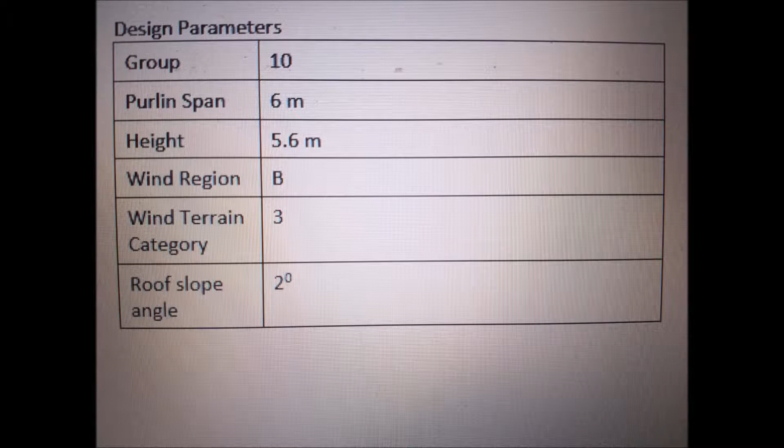And no, my screen is not dirty, it's scratched, okay? It's scratched.

So, while I wrote a fantastic, riveting introduction that would make Shakespeare quake, the smart ones were off calculating the self-weight of purlins, the weight of the ceiling, weight of insulation, services, and loads.

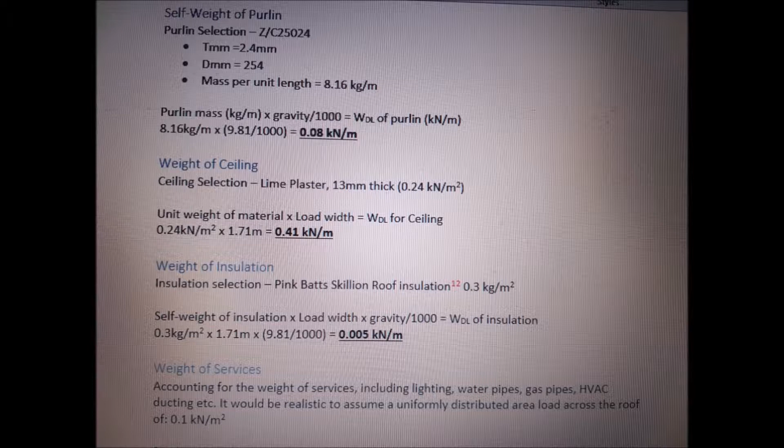The focus of this assignment is to design a basic shed in a Region B location, in accordance with Australian codes and regulations, while demonstrating critical thinking abilities in terms of design, problem solving, and identifying various hazards. The proposed shed will span 6 metres, reach 5.6 metres in height, and is classified under Wind Terrain Category 3.

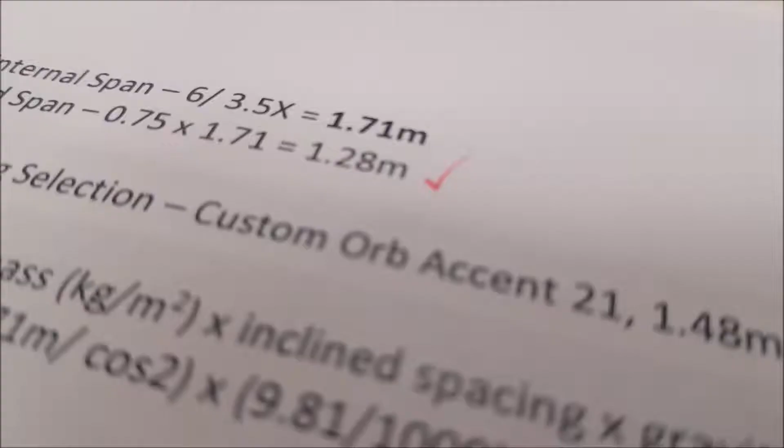When designing a shed, a multitude of structural elements must be taken into consideration in order to produce a fully functioning, safe and practical construction, which will remain fit for use and be durable enough to lessen the need for maintenance. Fundamentals to consider include bracing layout and design of bracing elements, purlins, typical sidewall girts, columns, rafters and design loads.

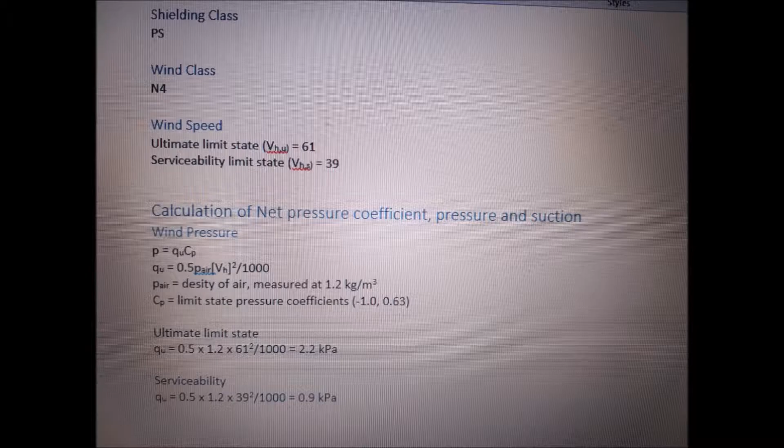The shed will be designed as a braced box structure, an effective design in terms of wind loads. All connections will be pin ends made from structural steel, as this is the most successful option in terms of withstanding tension and compression. The roof and walls of the proposed shed will be Lysaght Trimdek, a superlative option in terms of shed design, as the long-spanning cladding allows for wider spacing between supports.

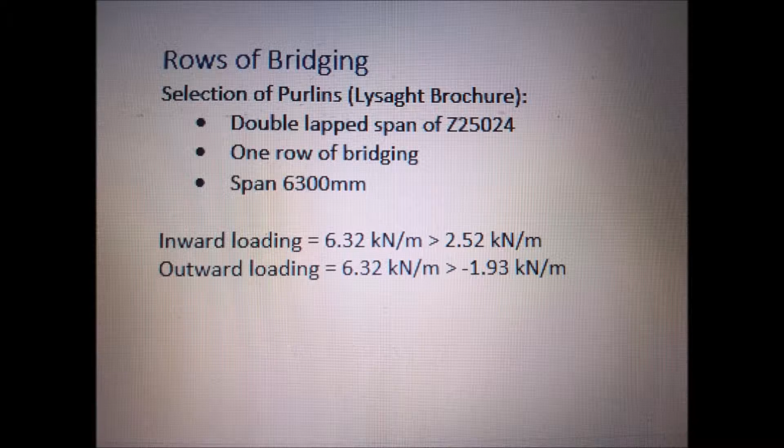The purlin and girt sections will too be made of Lysaght manufacture. Determining design loads, such as dead and live loads, is crucial to the process in order for the shed to be able to support and sustain loads and resist forces.

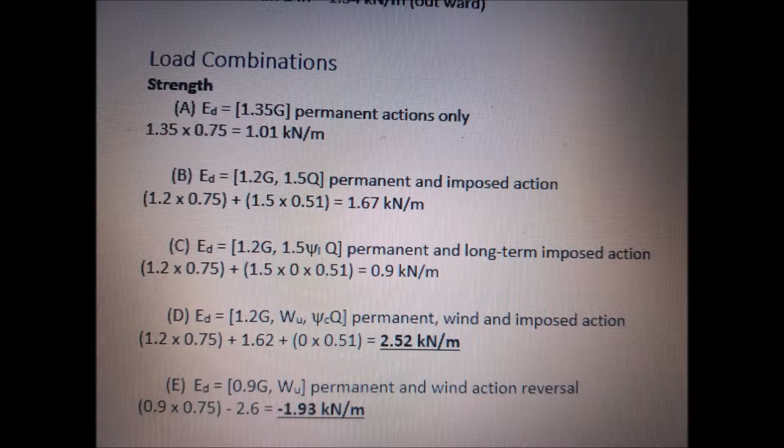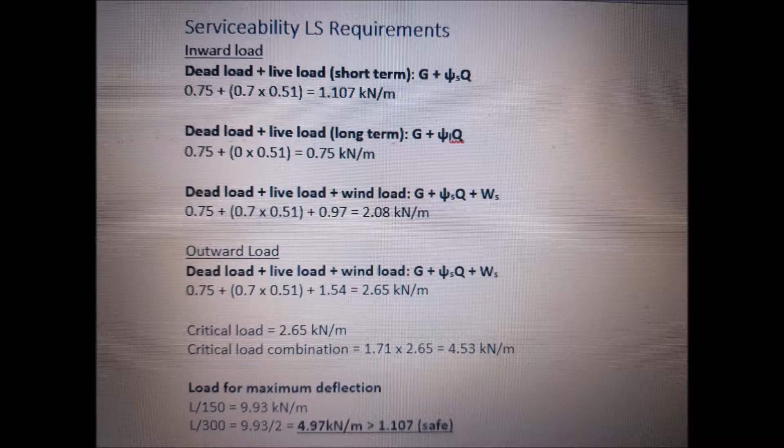Wind loads must also be taken into consideration. Wind actions occur when airflow applies pressure on a windward wall, passes over a structure and moves away from the surface of the roof, creating suction, and therefore creating suction on the leeward wall also. Failure to calculate wind loads appropriately renders the structure susceptible to damage and negatively impacts the dynamic quality of the structure. The proposed shed in this scenario is located in Region B, with partial shielding and a wind terrain rating of 3.

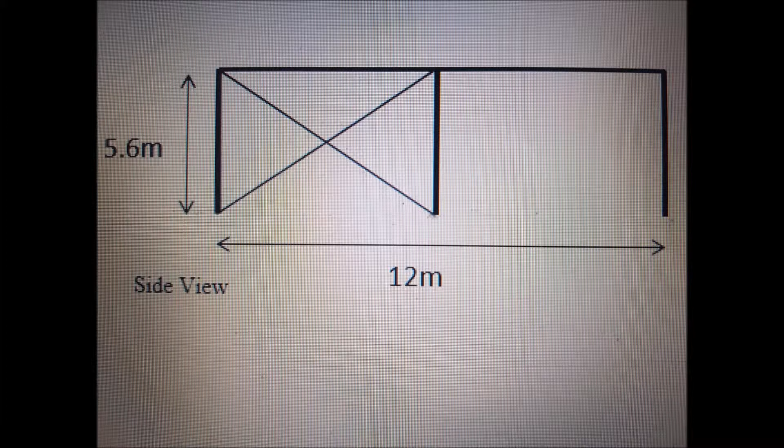Now, two words: roof bracing. In order to design the roof bracing, all compression and tension forces need to be calculated. These have been calculated through the use of method of section and method of joint, as well as the R-loads have been found. The diagonal members and struts were calculated as you are seeing on screen right now.

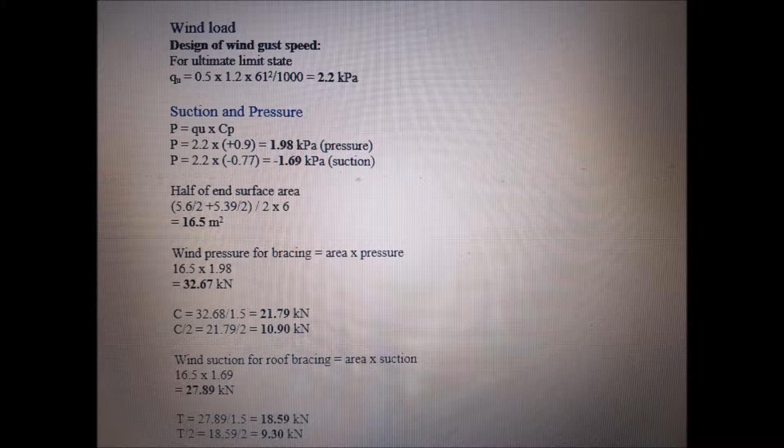The bracing member chosen for diagonal member 1 is a rectangular hollow section, 65 by 35 by 2.5. This member is safe for bending at both X and Y axes, as their load capacity is higher than that of the design force being 11.21 kN. For this member, we were designing the critical load, which in this case is compression.

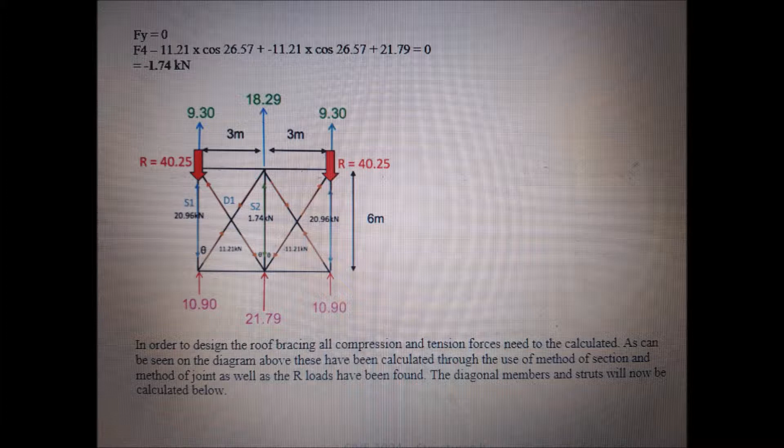The bracing member chosen for strut member 1 is a square hollow section, 65 by 65 by 3. This member is safe for bending at both X and Y axes, as their load capacity is higher than that of the design force being 20.96 kilonewtons.

The bracing member chosen for strut member 2 is a square hollow section, 35 by 35 by 1.6.

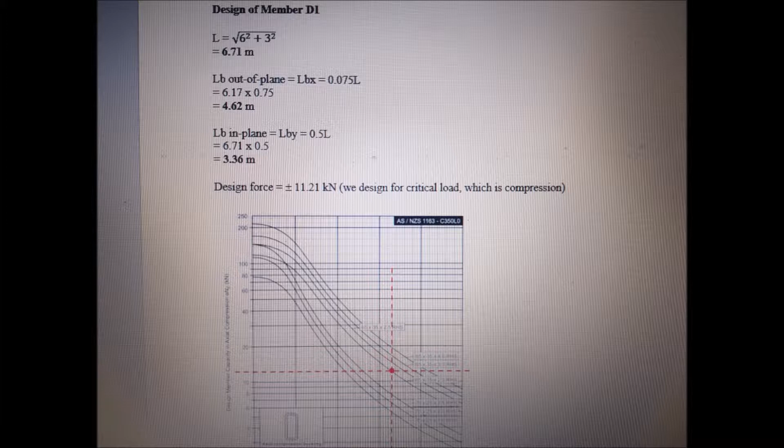This member is safe for bending at both X and Y axes, as their load capacity is higher than that of the force being 1.74 kilonewton.

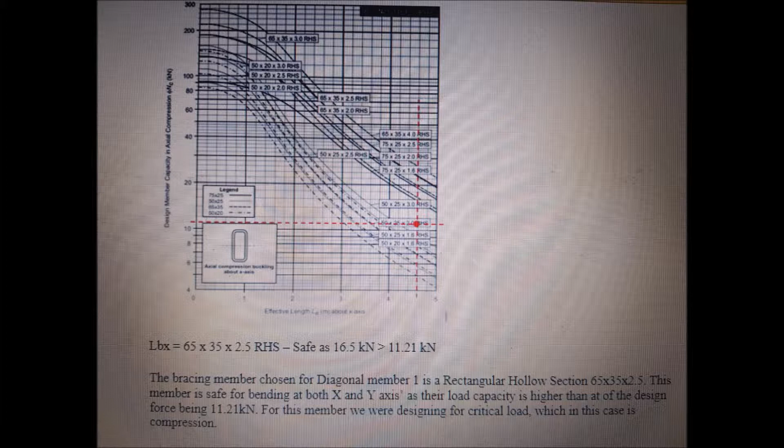In this case, the table stops at a length of 5 meters, and the length required is 6 meters. The table has been manually extended, assumed as to the direction of the member line.

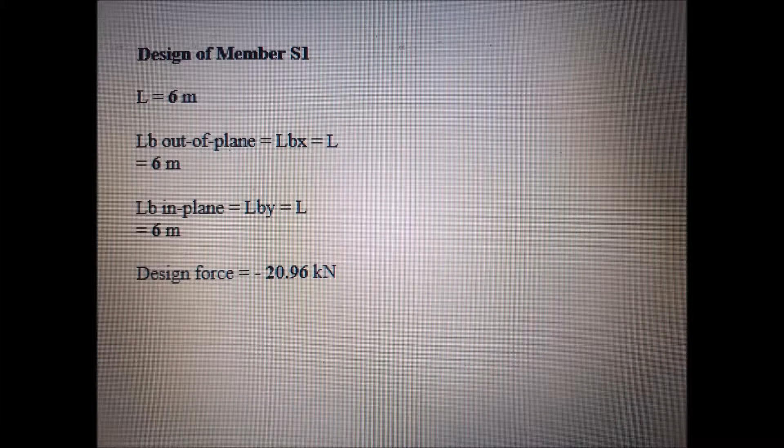When designing the wall bracing, what needs to be considered is the horizontal roof truss is supported by the vertical truss. The wall trusses, or the vertical bracing, are the supports of the horizontal bracing, hence the reaction of the horizontal truss is the lateral load for vertical bracings. I hope that made sense.

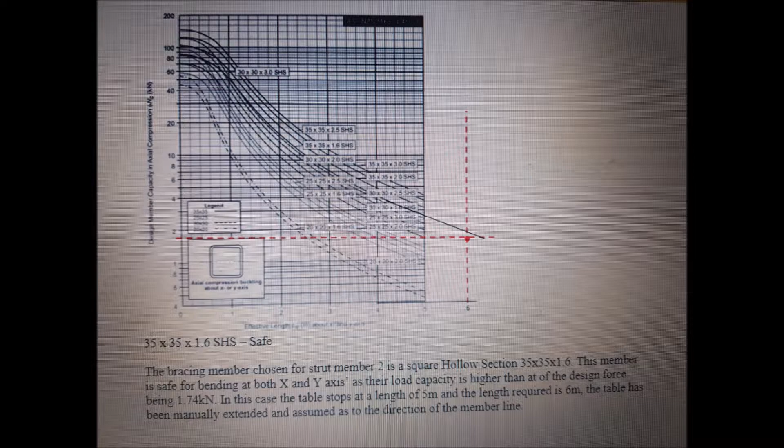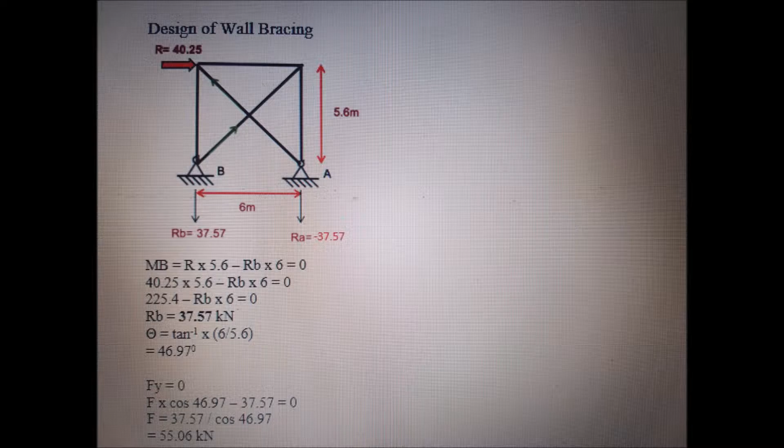In this case, it is assumed that the wall bracing is long and slender, and that compressive members are assumed to be zero force members, and all panel shear is resisted by tensile diagonal only. Members under compression force are ignored. Equal angles are used as tension cross bracing, and the forces are relatively small.

All members designed check out with all serviceability requirements and fitted within the capacity table parameters.

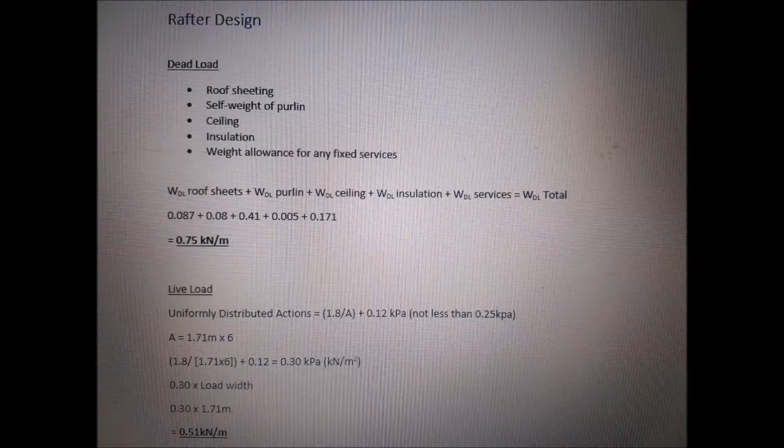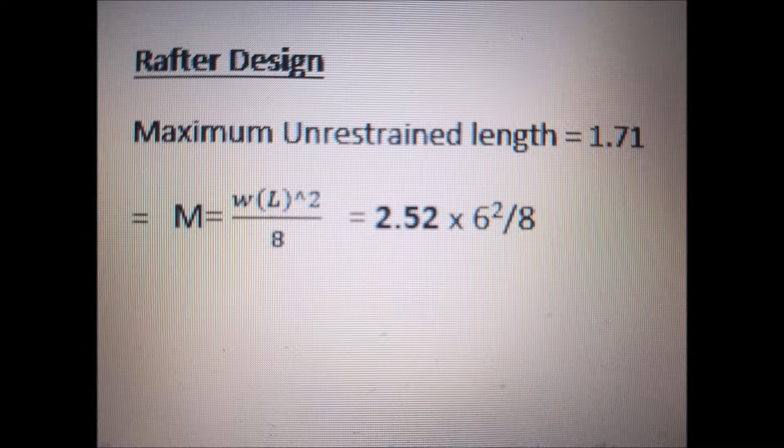Firstly, we had to calculate the loads and then the load combinations. The next step was to design the purlins. The fourth step we took is to determine the unrestrained length and then use the capacity tables to select the member that correlates to the maximum unrestrained length.

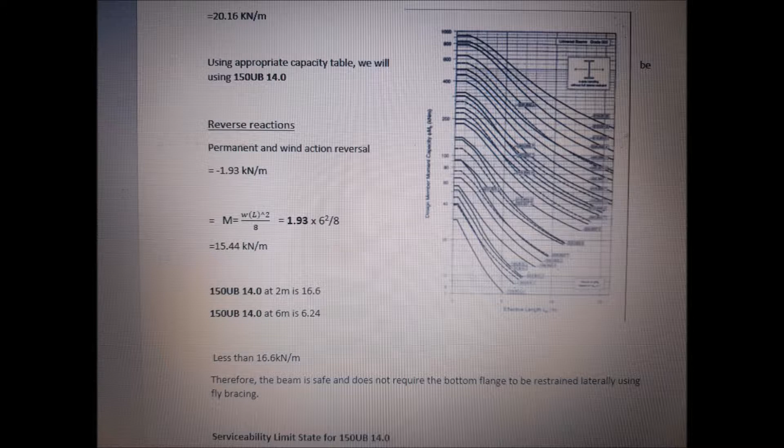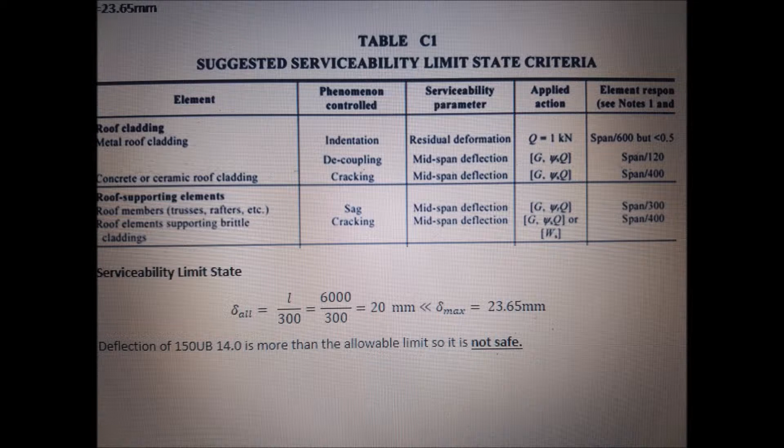After that, we calculated the reversal actions, to which we found out that no fly bracing was required. We then calculated the serviceability limit state. The rafter was deemed unsafe, and so we had to repeat steps 5 to 8, selecting the member from the capacity table to calculating the serviceability limit state.

The final member selected was member 150UB 18.0.

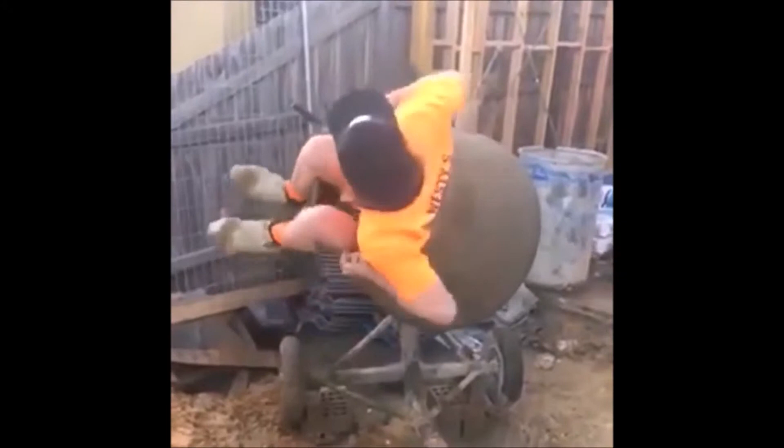Now to column design, where at the last minute we found out that we had calculated them all wrong and had to redo them. This assignment truly felt like we were going around and around and around.

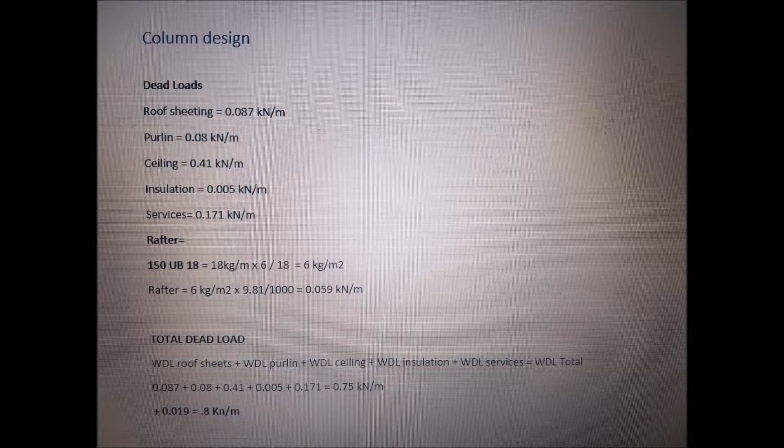To design a column, we first calculated the loads and load combinations. Using the load combinations, we were able to find N maximum and MX corresponding, and vice versa, MX maximum and N corresponding. We calculated the buckling in plane and buckling out of plane.

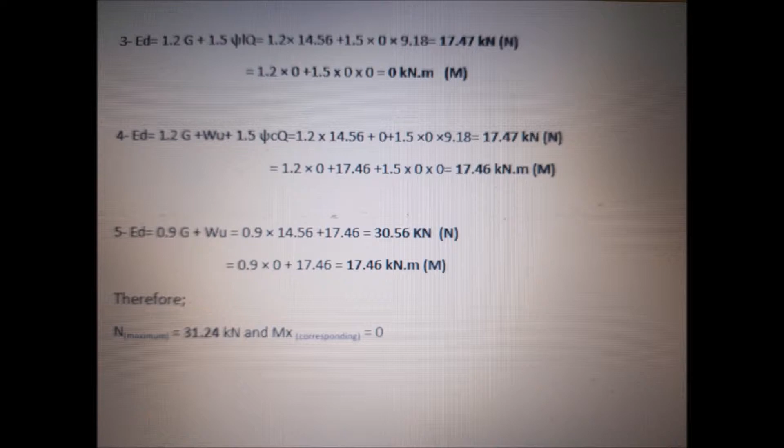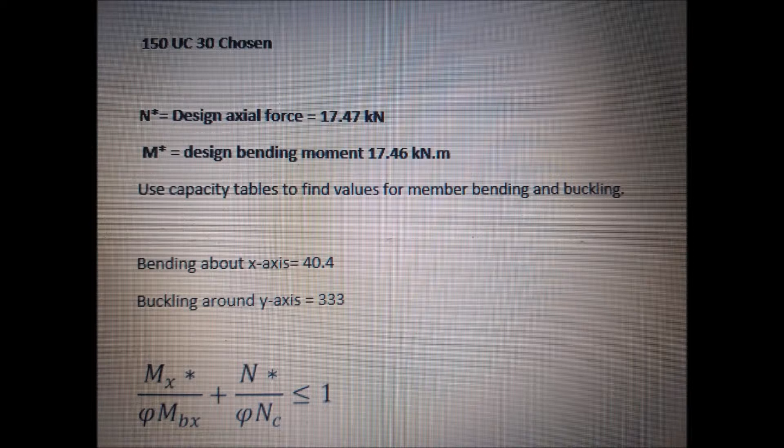We then used the capacity tables to find a suitable member, which turned out to be 150 UC30. We then checked if the member was suitable for buckling in and buckling out. We checked the column capacity for the combination of compression and bending moment to make sure it is safe, and hooray! 150 UC30 was the member of our dreams all along.

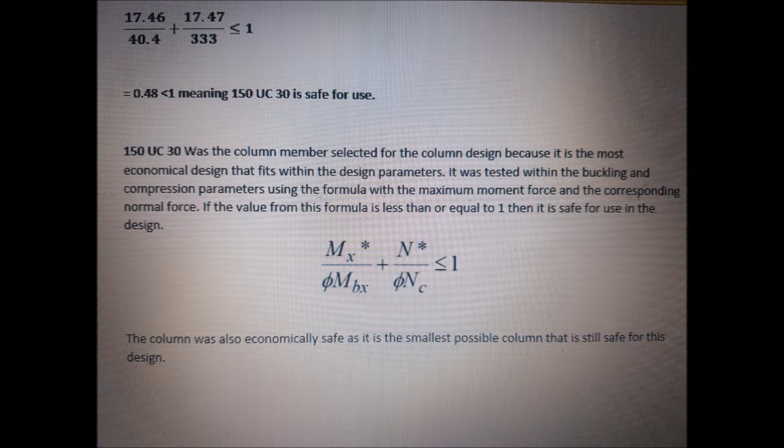In terms of space gass... Hey, you can do the space gass stuff, right? Nah bro, I thought you knew how to use space gass. Dude, I have no idea how to use space gass. I didn't touch it at all last year. So what are we gonna do? That's a tomorrow problem, it's due tomorrow. It's a tomorrow problem!